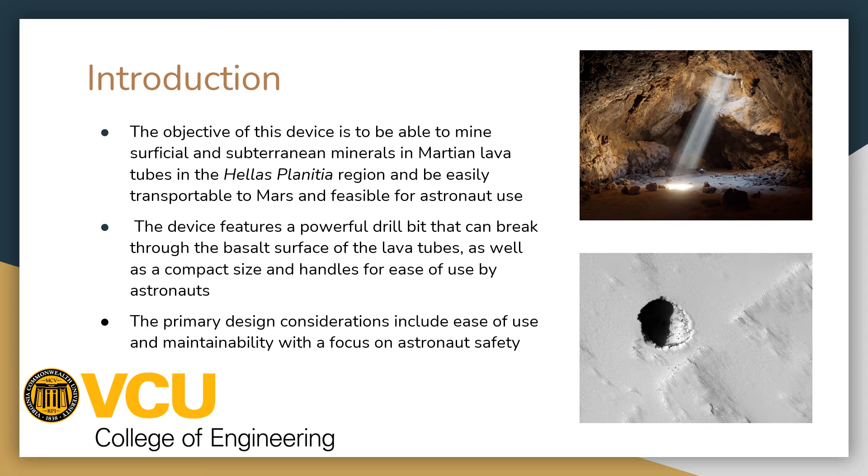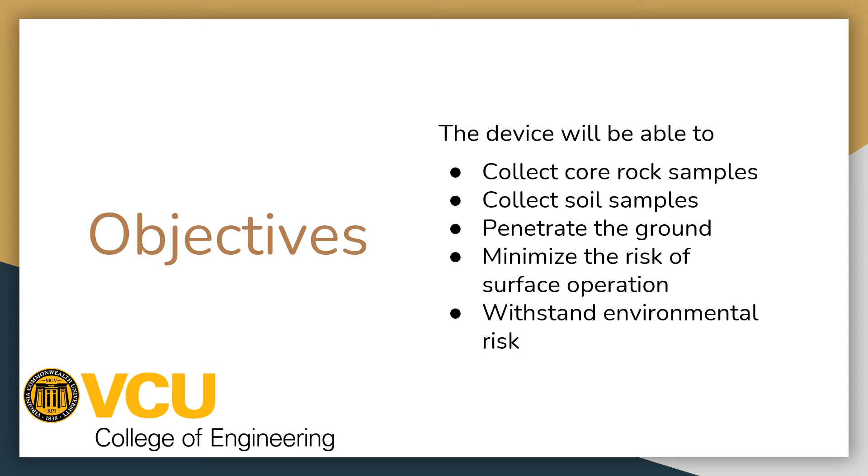Several objectives for this device are that the device will be able to collect core rock samples, collect soil samples, penetrate the ground, minimize the risk of surface operation, and withstand environmental risk on the surface of Mars. Next, you will see the design of this drill.

Design specifications include both operational constraints and functionality constraints. For operational constraints, a polycrystalline diamond compact drill bit was used to penetrate the basalt surface, and the device must be able to tolerate atmospheric temperatures between -100 and 100 degrees Celsius. For functionality constraints, the drill must maintain a constant speed of 1000 RPM, and it must be operated by a constant force of 810 newtons.

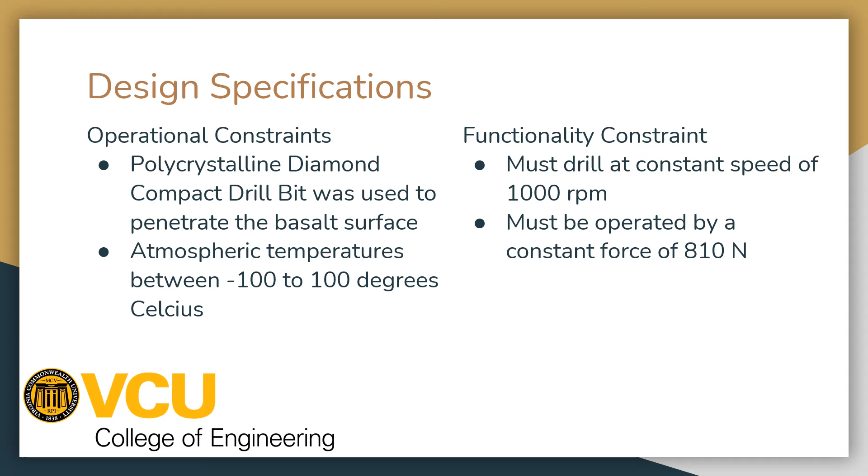Other design specifications include manufacturability constraints, maintainability constraints, and depth capabilities. For manufacturability constraints, the device must be manufactured on Earth and then sent to Mars with the crew, transport, or resupply. For maintainability constraints, the device must be easily maintainable on the surface of Mars. And for depth capabilities, the drill may extend a maximum of 6 feet into the surface, equivalent to the shaft length.

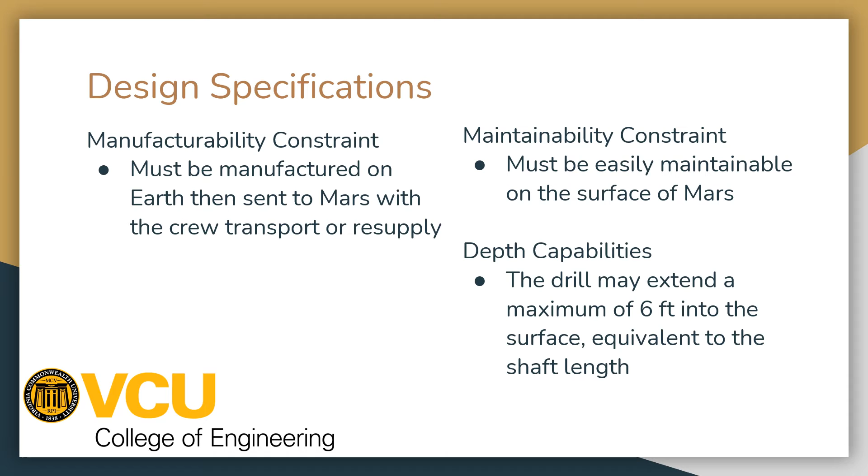The drill bit material is polycrystalline diamond, which was chosen for its high penetration rate in basalt, which is the lava tube surface material. The drill bit has a customized design inspired from Figure A, the one on the top. The drill bit is approximately 5 inches in diameter.

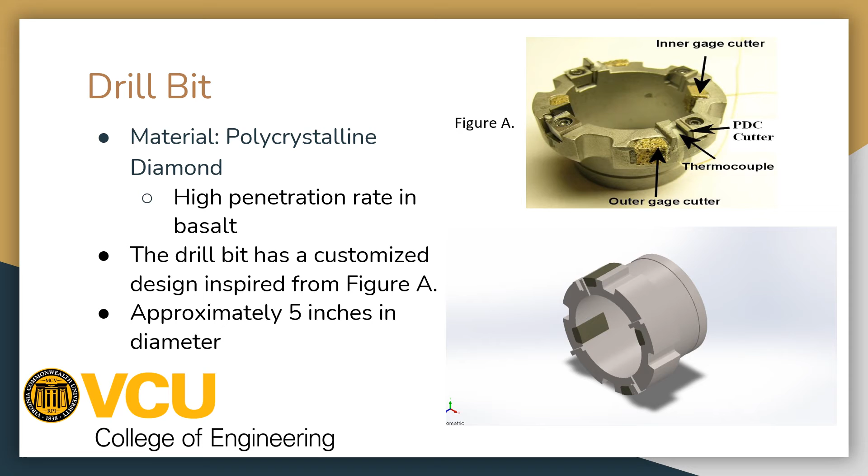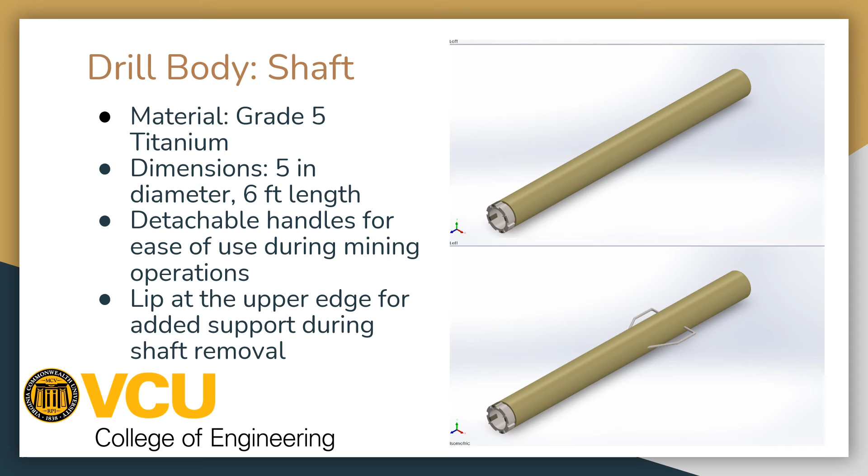The shaft material is grade 5 titanium, which was chosen for its strength to weight ratio. The dimensions are 5 inches in diameter and 6 feet in length. It features detachable handles for ease of use during mining operations, and there is an added lip at the upper edge for added support during shaft removal. Next, we will go into the analyses performed on this drill.

Calculations were done in MATLAB for the drill bit, the bearings, and the shaft. For the drill bit, the operating force is 809 newtons, and at -60 degrees Celsius, the Mars surface temperature, the uniaxial compressive strength of basalt is 295.2 megapascals. The force, strength, and area were calculated for the drill bit.

For the bearing, at a 90% reliability for 500 hours and 1000 RPM, the design life is 30 times the manufacturer's rating with a C10 value of 2.25 kilonewtons. For the shaft calculations, the von Mises stresses, alternating and mid-range stresses were calculated using the DE-Goodman criteria to calculate failure.